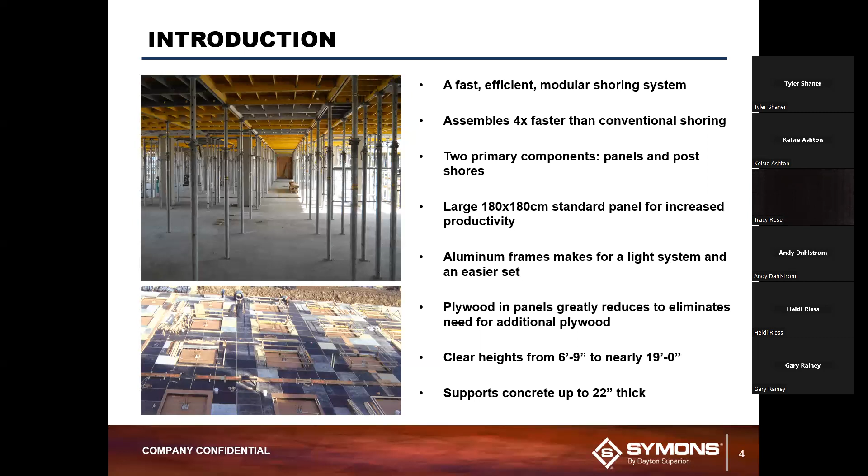The frames are made out of extruded aluminum, so it's extremely lightweight and also easier to set in that case. The 180 by 180 panel weighs just over 100 pounds. It utilizes plywood inside the frames. So think of our Symply or steel-ply panels. They have the frame with the plywood already in it. In this case, that's what this is. So the aluminum frames come with a plywood inset, trying to greatly reduce or eliminate the additional plywood on site. Clear heights for the post shores from about 6'9" up to nearly 19 foot, and it can support concrete up to 22 inches thick.

Taking a look at the standard panel. This is a 180 by 180 that's shown. Just some nomenclature here for you on the panel. You can see the frame, all extruded aluminum. You've got a center rib through the middle of the panel. That is only on the 180 by 180, but I wanted to show it here for you. You can see the sections of each one of these, the ribs and the rails as well. You've got a side rail along the right and left-hand side, and then end rails on the top and bottom, as well as cross members you can see throughout the panel. Again, it uses a 10 millimeter 5-ply birch for the plywood, and we attach that using a drive rivet.

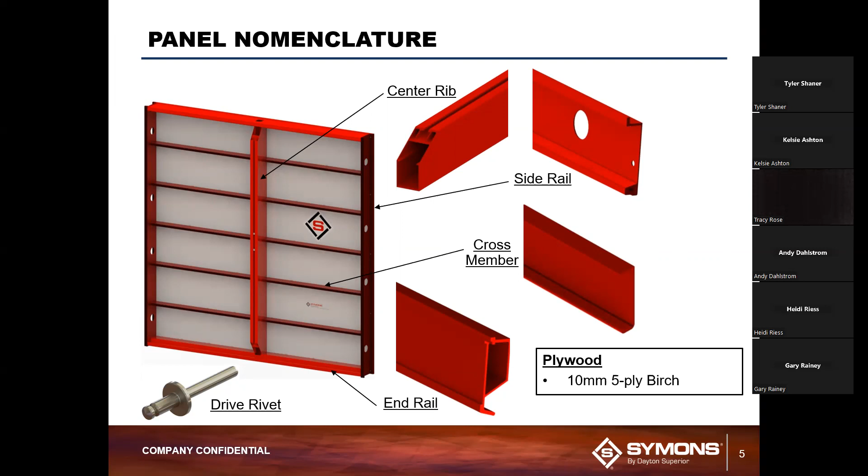Here are some additional panels, all those standard panels, so you can kind of get an idea of what we're looking at here for the different sizes. You can see that main panel, 180 by 180, weighs just over 100 pounds. Then after you get into the smaller panels, you can see this system can really be set by a single individual as you get going out there in the field.

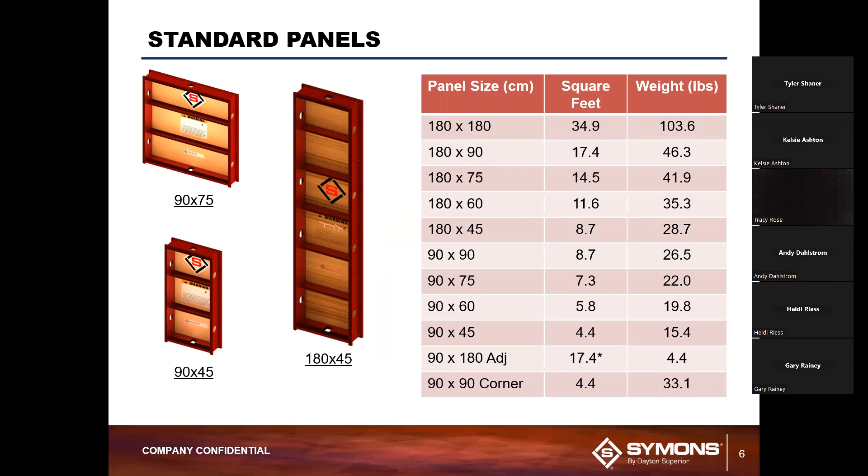The second main component to the system, as I mentioned, you have panels and you have post shores. So here are the two main post shores, the 350 and 550 post shores. Pretty common out in the industry. I'm sure most of you have seen these or used them in the past. You can see the details there. I won't go through the entire chart.

The 350 ranges about 6.5 to 11.5 feet. You can see the weight is about 46 pounds for that unit. The 550, a little bit taller, 10 foot up to about 18 foot. And it weighs, it's not showing there, but about 75 pounds. You may recall I mentioned that this can go up to about 19 foot in height. That's due to the bearings that you'll see here in a minute, which add a little bit of height on top of the post shores.

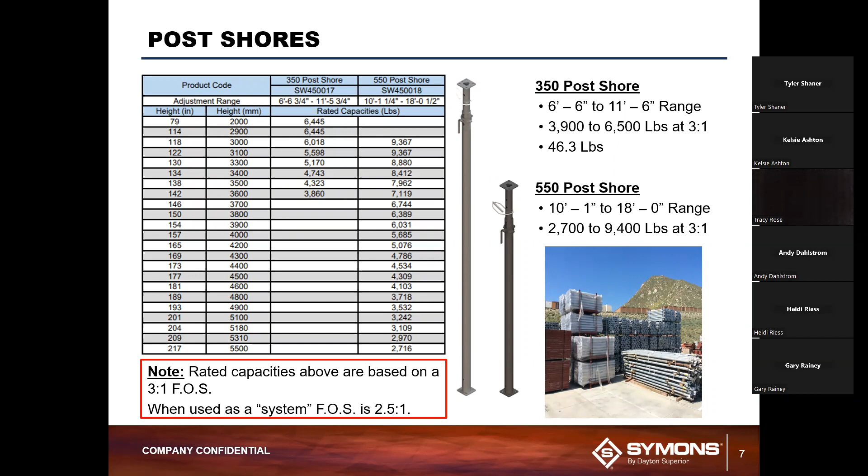The capacities that you see there are at 3-to-1 factor of safety. That's standard for using a single post shore. However, when we put them into a system application such as this, we get 2.5-to-1. So the actual ratings that we're able to design for and engineer for are a little bit higher than what you see there.

Bearing and edge support bearing. So the bearing goes on top of the post shore, whether it's 350 or 550. You can see the construction there of those post shores with the bearing. If we use the 550, we're going to put a post shore sleeve support in there. That's just to accommodate for the larger hole in the 550, stabilize that bearing inside of there. That bearing is secured using a T-spring bolt. And you can see the two different styles there.

The main bearing has the 4 prongs coming out of it. That actually fits inside, you can see in the picture there, inside an inside corner of one panel, and you can have 3 more panels on there, so they all come together with the 4 corners. The edge bearing is used in an application, which you'll see in a couple slides, that allows that panel to go flush up against an existing structure or a wall.

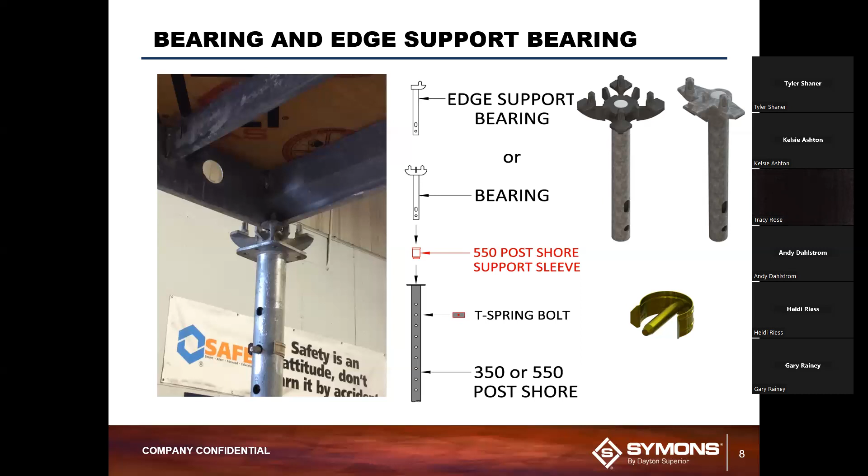An important feature to the 350 or 550 is the release pin. You can see that release pin on the left, and then in the pictures below. It's extremely important how this is put in and used. You can see the notches that are in the pin itself. That helps facilitate the stripping of the system after a pour.

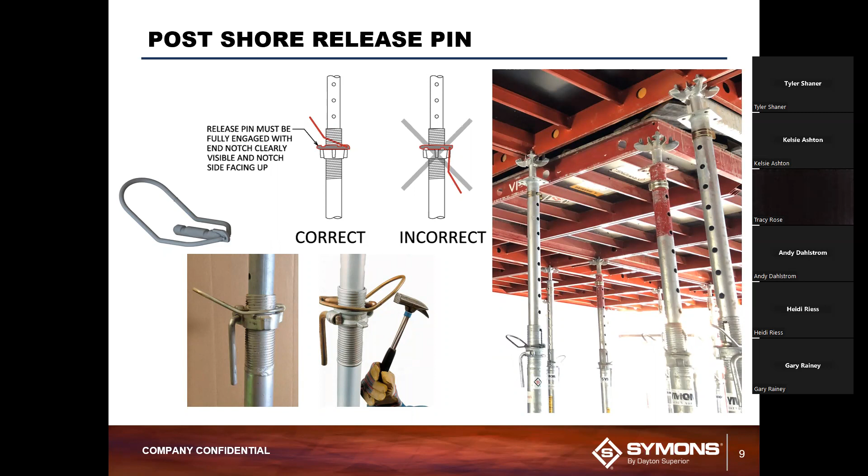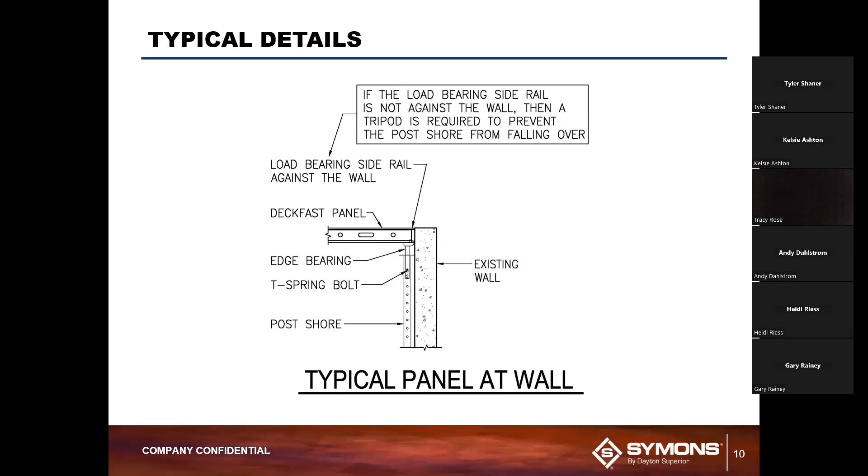Here's a typical detail. I mentioned the edge support or the edge bearing. So this is right up against an existing wall, so you can see that it's using an edge bearing there with the post shore. Just allows you to get that panel all the way up against the wall. And we're going to secure these panels, especially during the startup, to that wall, either by a wood cleat or tie wire that's coming out of the existing wall. That just helps secure those first few panels as you start up with the erection out in the field. And these are typical details that we'll have in our prints as well.

The DeckFast system does not have a lot of accessories, but I'm going to highlight some of the key ones here. The post shore tripod. This is typically used where you don't have a wall that you can start up against, or some columns that you can start your panels with, or you're just looking for some additional support. It helps stabilize the post shore during the startup.

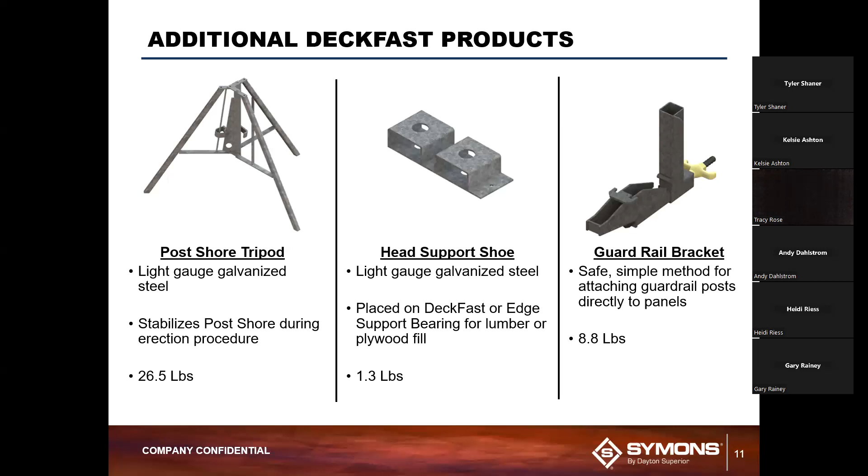On the far right, obviously important for safety on the edge or perimeter of the system, this is a guardrail bracket. It locks into the underside of the panels, which you'll see here in a few minutes. Very simple to use, and then we'll place a guardrail post on top of that.

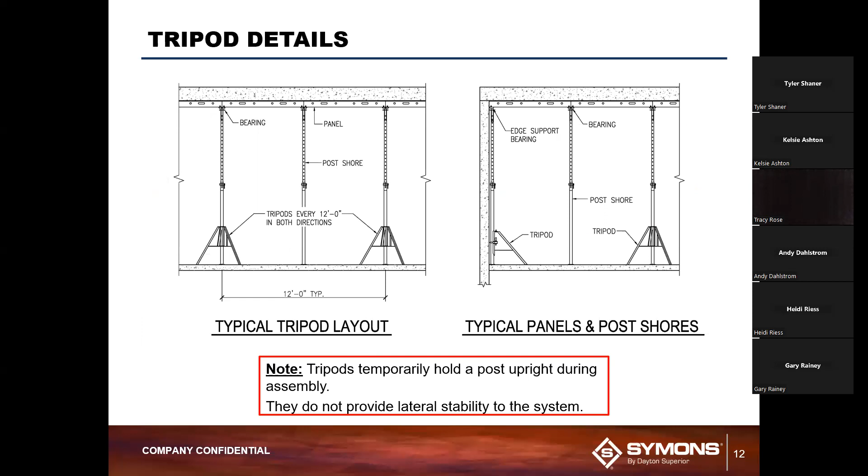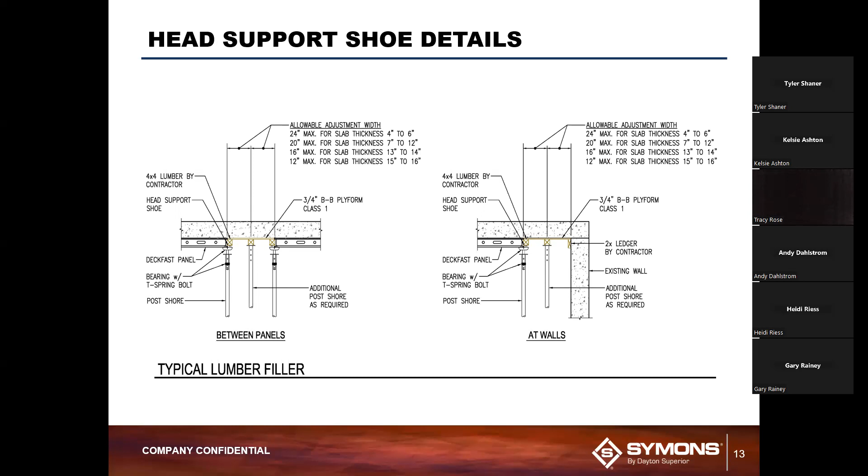There's that head support shoe. So you turn it upside down, put it on top of the bearing, and it allows you to put lumber on top of that. Again, standard details that we would have in our application prints that go out to the customer. There's a guardrail bracket that's underneath the panels, and then we'd put a guardrail post, and then the contractor supplies the actual lumber for the guardrail or the toe board at the bottom.

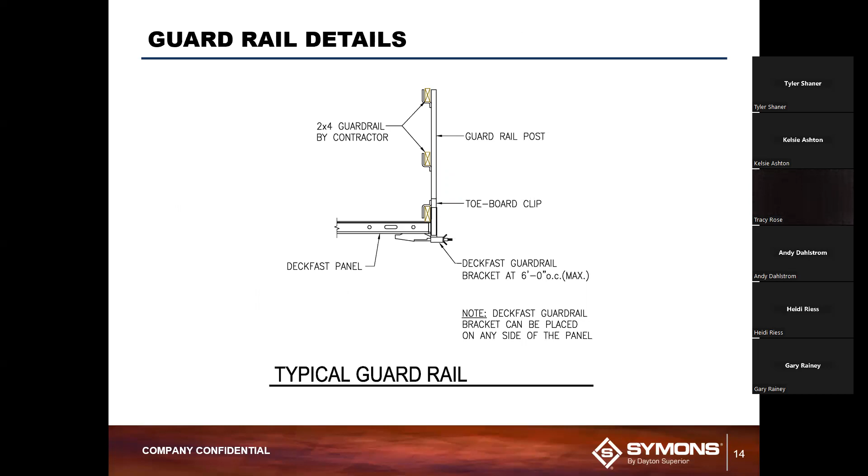There's some additional products. 180 bracing frame, again, some additional stability during startup or depending on the application. Maybe we don't have a starter wall again. Again, those will be in our application prints. The engineering team will specify those.

Transverse beam that can go up to 90 centimeters of an opening, or about 3 foot. Allows the contractor to put three-quarter plywood. In this case, you can see in the picture there, it's going around a column. So it just helps frame up where our standard panels won't be able to make up that difference.

Timber brace clamp, very typical use out in the field for us for lateral support on the system, where we've got to put some bracing or lateral support. So these will go around the column and then allow the customer to put their own lumber for that stability. We also have swivel clamps as well for like a 1.9 diameter tube.

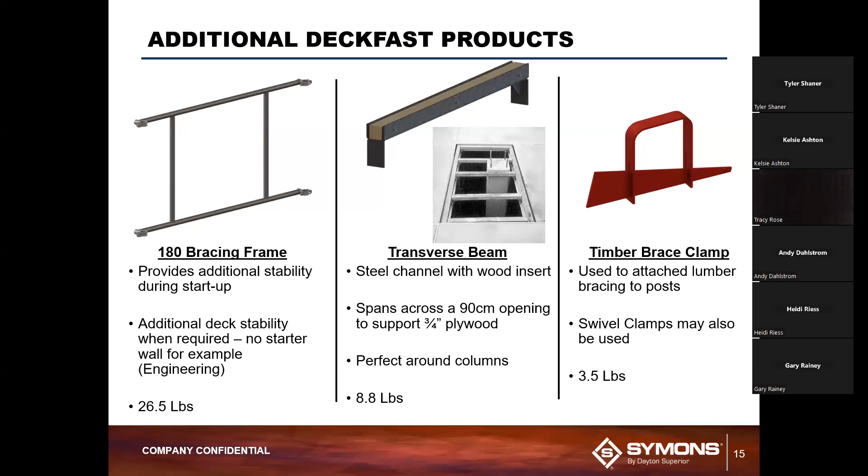So let's talk about a little bit of the application and use in the field. So really, the setup of this system is really easy. Step one is set it, right? You've got a 180 by 180 panel. You set those up on the bearings from below. Step two is you swing it into place, in this case using the DeckFast erection rod.

That also serves as a temporary support until step three comes in, which is you place the post shore, which ideally you want to preset to the right elevation, goes up underneath, and go get another panel, right? So you can see the speed that this can really go up, especially when you're setting 36 square foot at a time. It is pretty amazing to watch out in the field when you got a crew working on this, how quickly a deck can be put up.

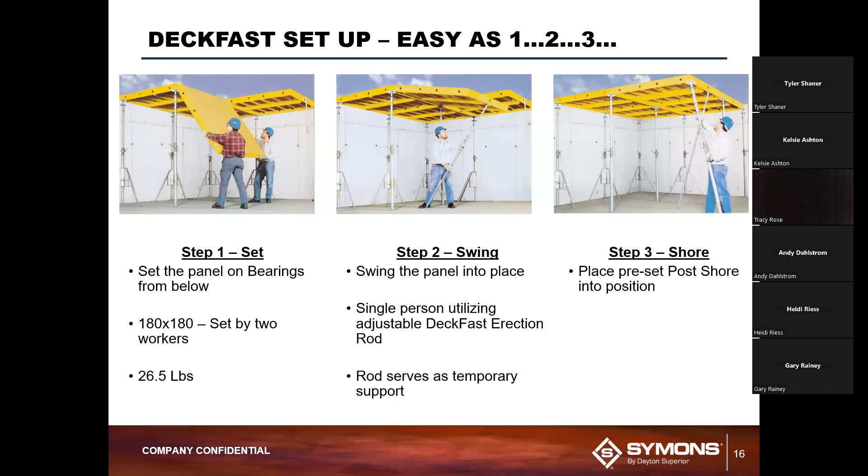Here's a typical application or layout. A very important part that you'll see is where we have a starting panel placed. Now this is about ideal as you can get. You got two square walls coming in. It's perfect to put a starting panel in that corner. You know, I'm sure we never see diagonal walls or the lack of a wall for that matter, but in this case, you got a perfect situation.

We're going to start that 180 by 180 panel. I mentioned before, we're going to cleat that to the wall for stability. Extremely important to set this first panel right, because everything comes off of that. You saw how it sets. It's just panel after panel after panel. So as with any type of construction, where you start and how you start is extremely important. So setting this first one right and getting it locked into those walls is important.

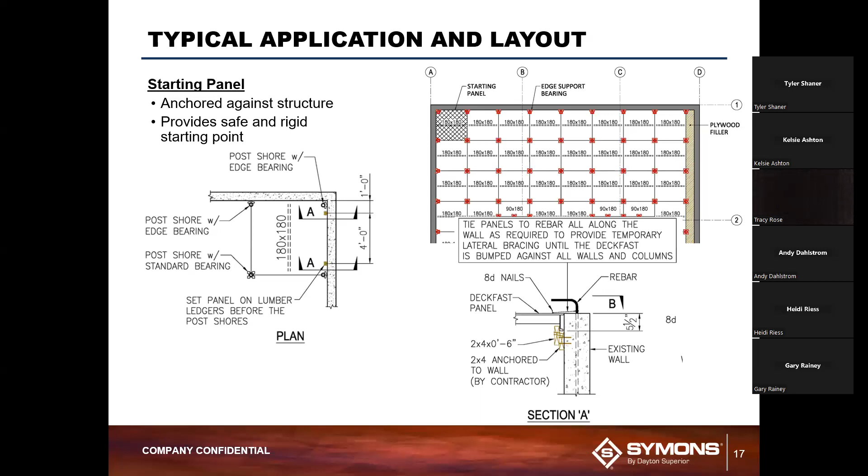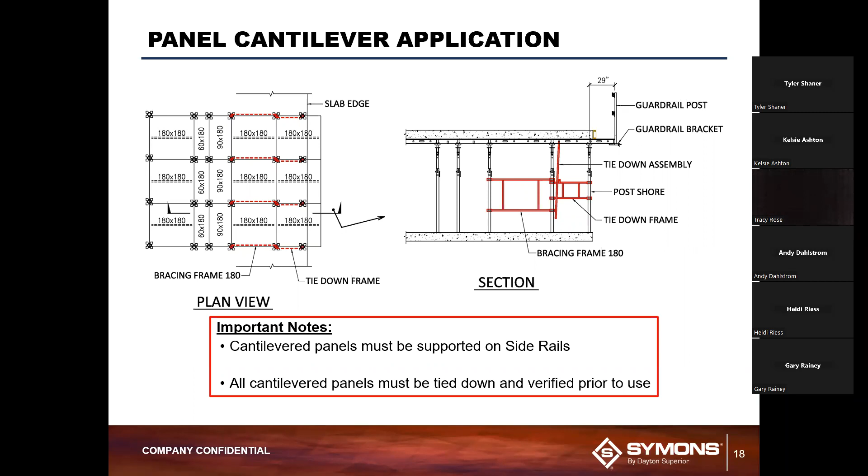So you can see those going across left to right, and then the section, the cantilever out to the outside of the building. So we have a bracing frame, and then we've got a tie-down frame and a tie-down assembly. All of this will be detailed. You'll see in the next slide everything that we show. Extremely important that these are tied down properly before we put anybody out on the outside of this structure.

I won't go through all of this, but you can see we take this extremely serious on how we detail this out. So you'll see this if you have a cantilever application, all of the details that we provide for ensuring that the frames are in place, the post shores are in place properly, panels are in place, and everything's locked down.

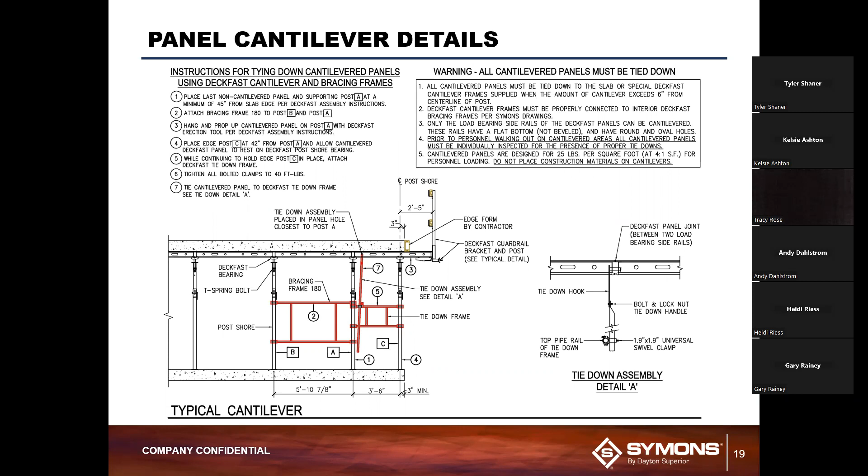Another application, not quite like a cantilever, right? This is maybe the end of a pour or the edge of the building. That's a little different structure here. So we've got a panel that extends out, and we're able to put a post shore there. We've got a guardrail bracket on the outside for safety, and then the contractor can come inside of there and put their own edge form inside of there to stop that pour.

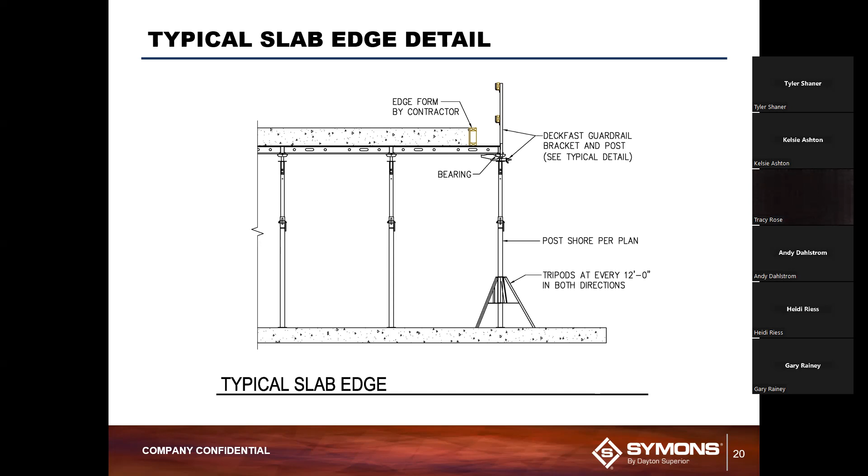Next, we can accommodate for sloped concrete anywhere up to 10% grade, but we are going to have additional lateral support. Obviously, in this case, we've got a tripod there to help just with the setup application. You can see a wood shim under there. We want to make sure that tripod is plumb to the world and keeping that post shore plumb as well.

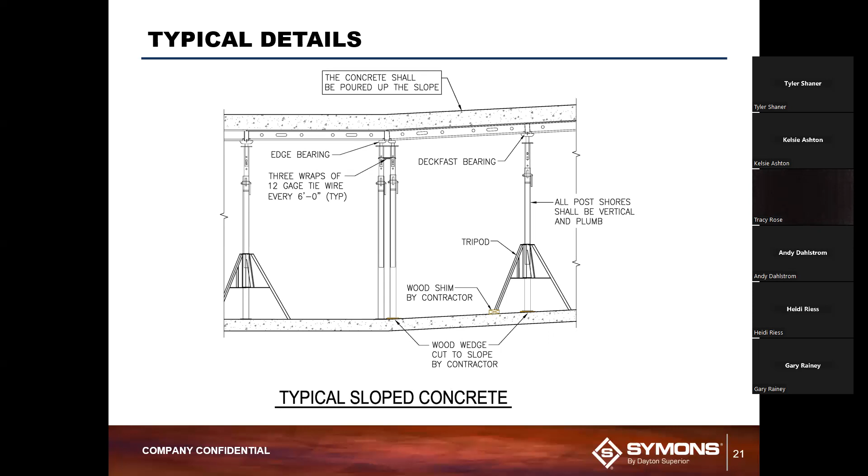At the beginning, I mentioned this is an ideal system for flat slabs, but we can also accommodate drop heads around columns, drop beams. You can see a couple different ways of doing that here. We're able to put a panel in for the drop head on the left-hand side and support it in the standard application. On the right side, maybe we weren't able to get a panel inside of there for whatever reason, but we can put up some head support shoes that you saw earlier, and the contractor can form the soffit there with their own lumber.

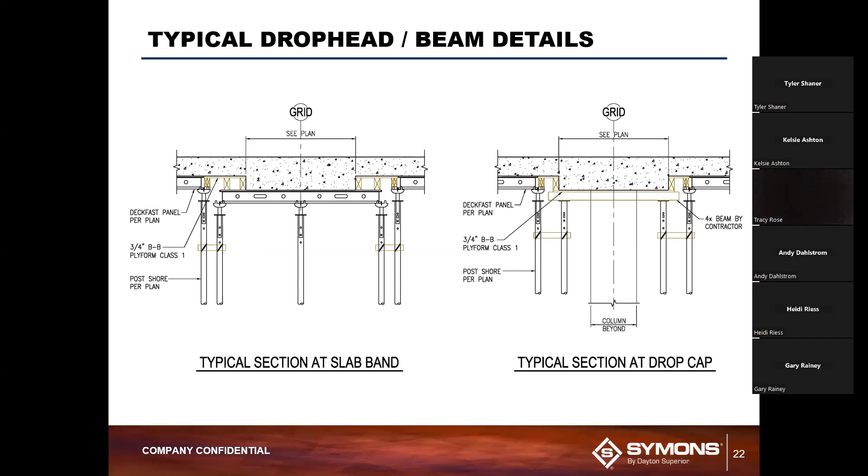Here's a typical application layout that you may see coming out to your contractor. You can see there's angles, there's drops, there's all kinds of different things within just this part of this structure, but wherever possible, you'll see 180 by 180. So you can see the clean look as much as we can possibly get throughout there.

You can see the system can also accommodate different drops in the slabs, different edge looks, angles, and so forth. So while it's very good for your wide open, that rarely happens. But this system is able to accommodate more complicated structures as well.

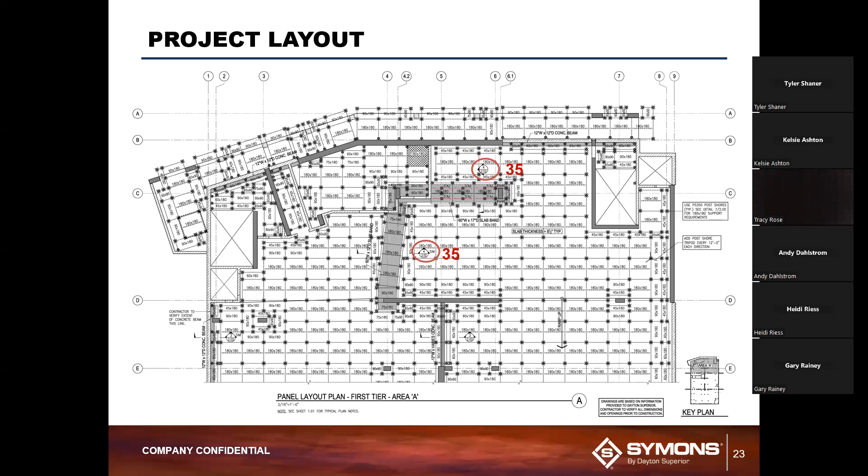Here's some typical applications out in the field. So on the left-hand side, you've got some smaller panels up in the air supported by your bearings and post shores. On the bottom right there, those are 180 by 180s. You can see the center ribs in between the post shores as you go down there. You can see you're about 6 foot by 6 foot on the grid pattern for those post shores.

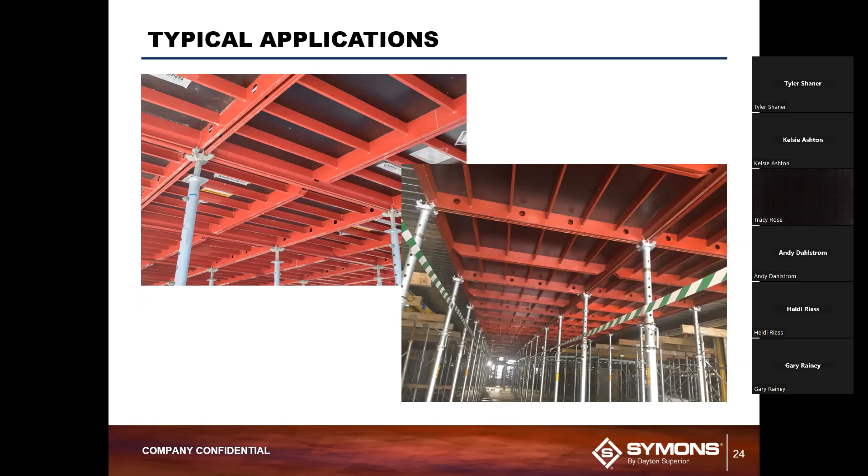Couple other applications. Top left is a good example of being locked inside of two existing structures. Pretty nice application there to use. You don't have to worry too much about lateral support there. But again, a wide open look there for DeckFast.

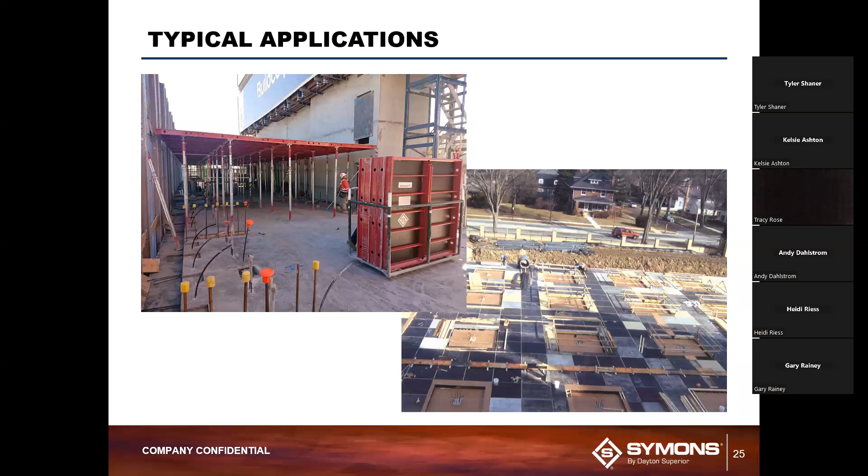On the bottom right, you can see some drop heads there at the column location. So we're using 180 by 180s again wherever we can, standard panel sizes, and then accommodating the drop heads around the columns. There's a little bit of lumber around the column there. So again, we use our standard panels around it as much as we can, and then we start to use our accessories around the columns.

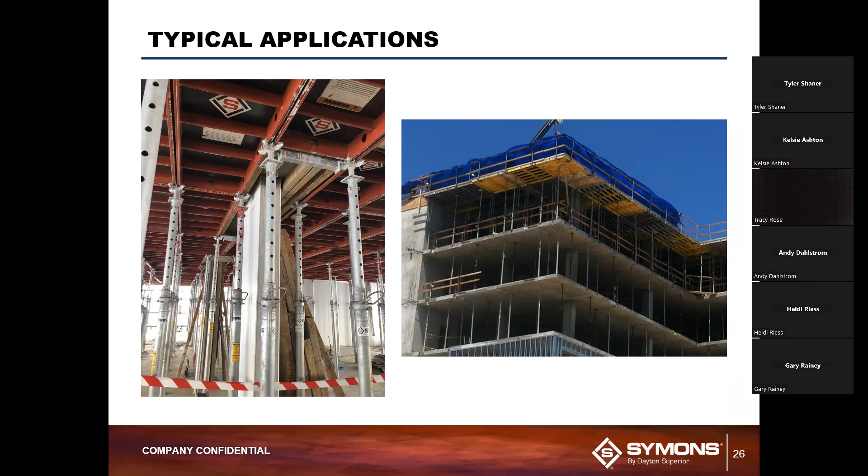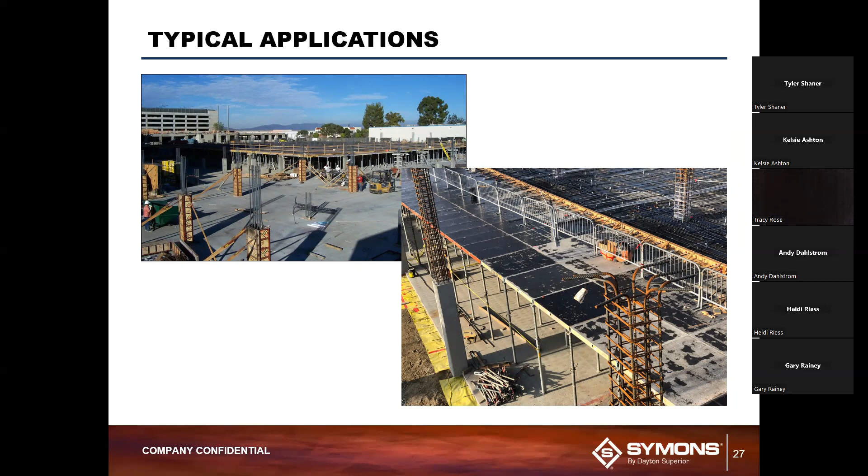So that's a quick look at DeckFast. As always, with all of our systems, we've got a lot of additional support documents. We've got a DeckFast safety sheet that you'll see there. It comes out with our standard applications along with our standard shoring safety sheet. We've got application guides, brochures. We've got tech data sheets that are online as well for all of our different products. That one shows the 180 by 180 panel, but they'll have post shores, the edge bearings, all of those as well. So that's a quick look at another great system we have here in DeckFast.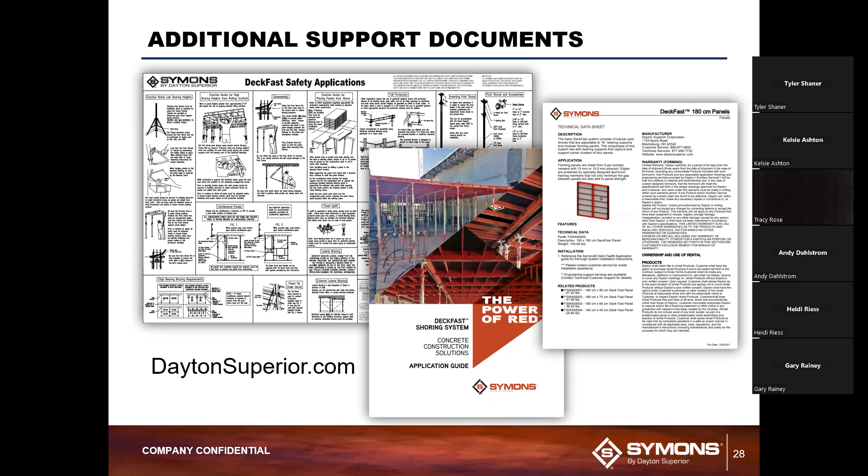I'll turn it back over to Heidi. Thank you, Tyler. I actually didn't know much about this, so thank you for training me today. I think it's pretty cool to see the systems used with other systems, and where we have customized it, we try to do the best possible way with standards. That's what I kept hearing you say.